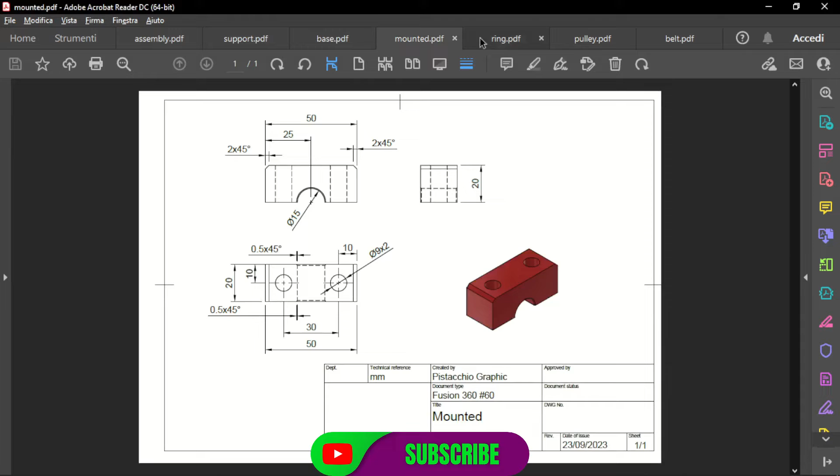Let's start this project with a new design here. We start to create the first part, that is the support. Create our first sketch here.

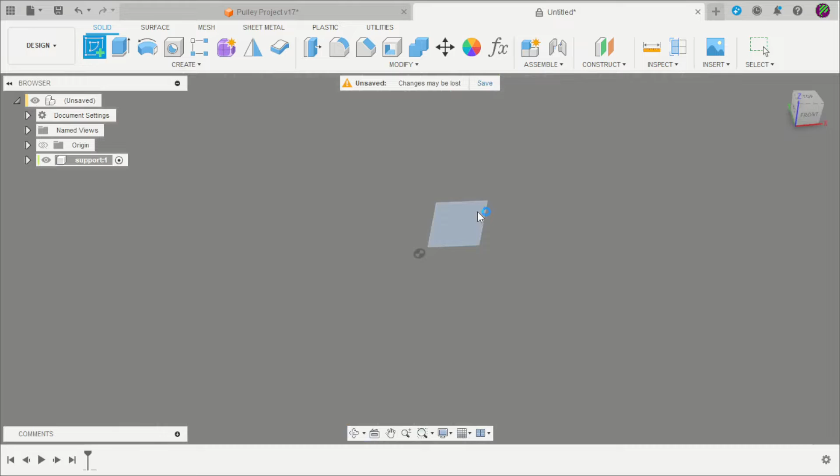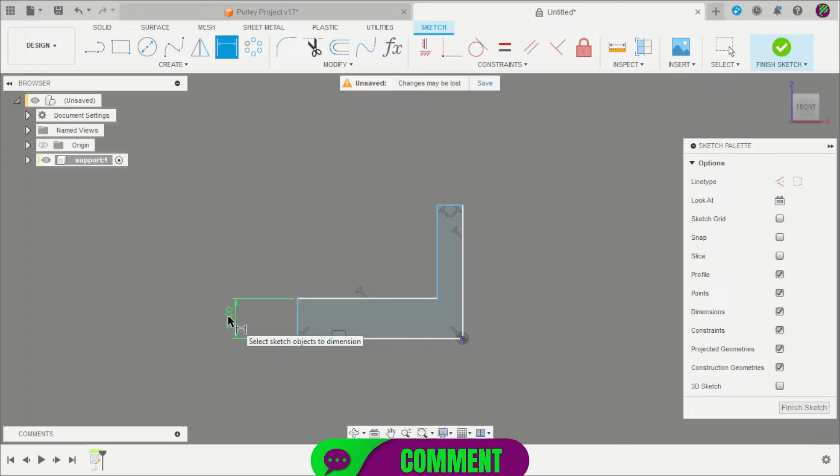Start the first lines. Constrain this point to the center point. 18mm thickness here. This is 208mm with 188mm.

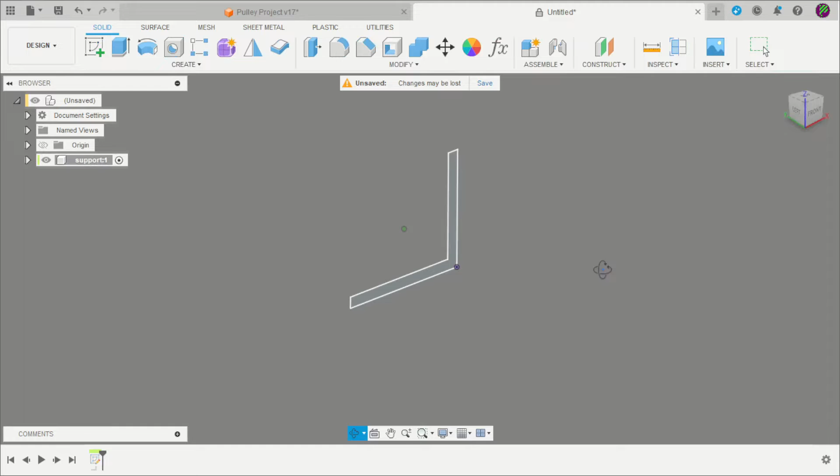Now we have our first profile. The width is 6mm. Use the extrude tool, select the profile, change to symmetric. The distance is the whole length—change to 60mm.

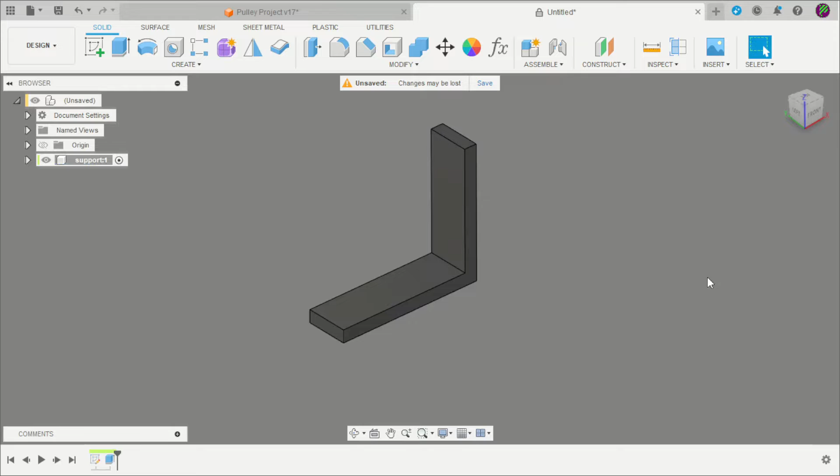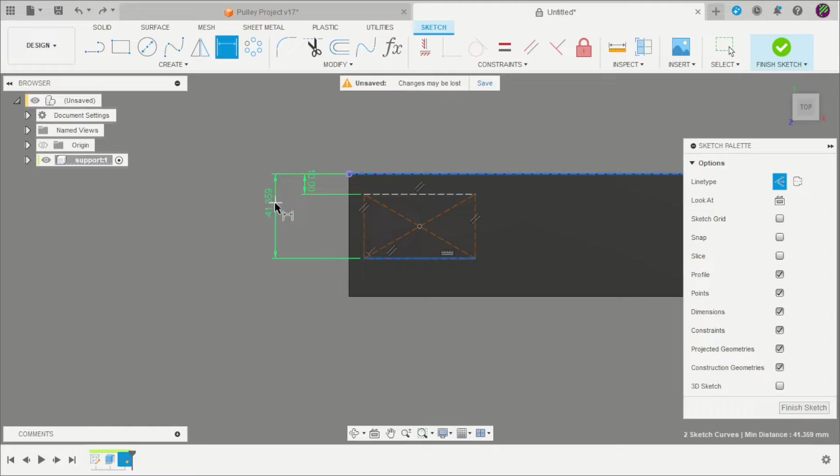Select this face. Start creating a rectangle by the center, but first we change the line type to construction, the rectangle by the center. Let's see the measurements here: this distance is 10mm, this distance from the border is 50mm, the other distance from the border is 12.5mm.

Here, 12.5, and the other distance is 87.5mm.

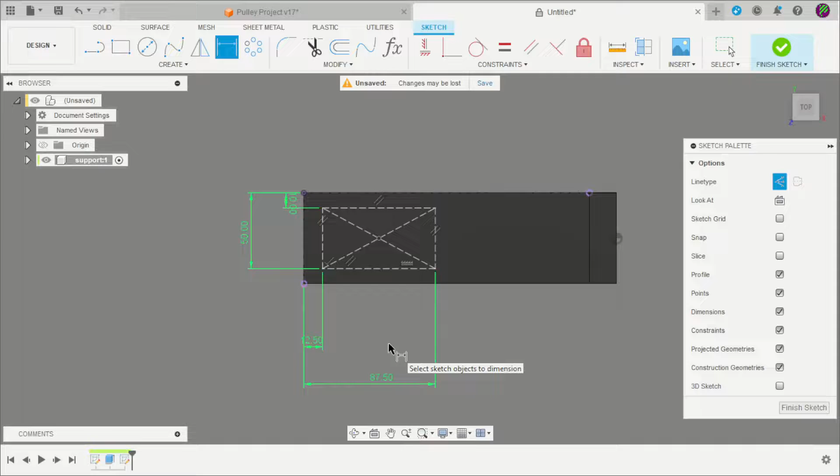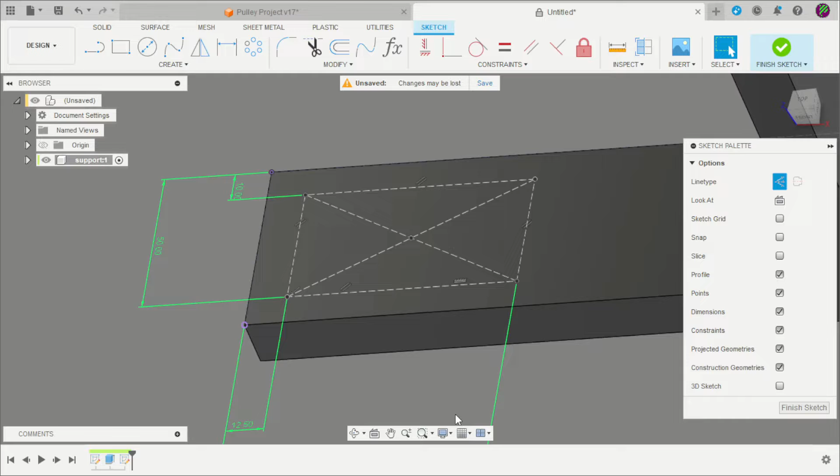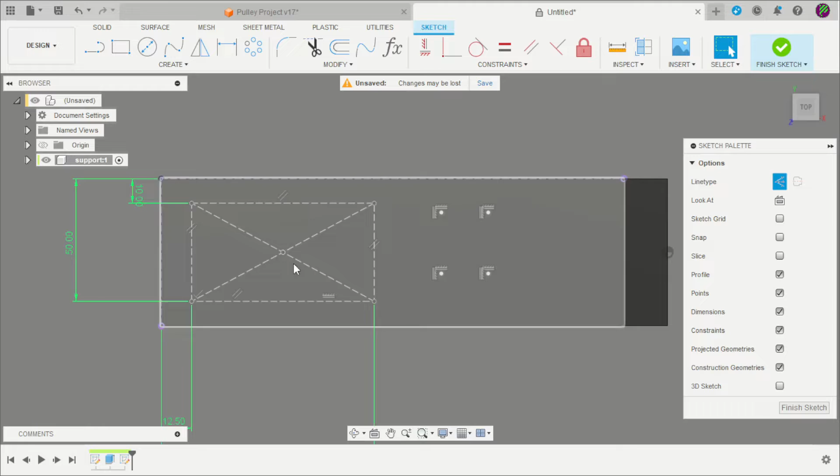Now I learned a technique to create these points, to make the holes in the project, from a subscriber on the channel. He said I can use this—it's easier to create points on the sketch this way than creating points and constraining them horizontally and vertically like before. He said using a construction rectangle by the center is better than my old technique, and that's the method I'm using right now. Thank you so much for this comment.

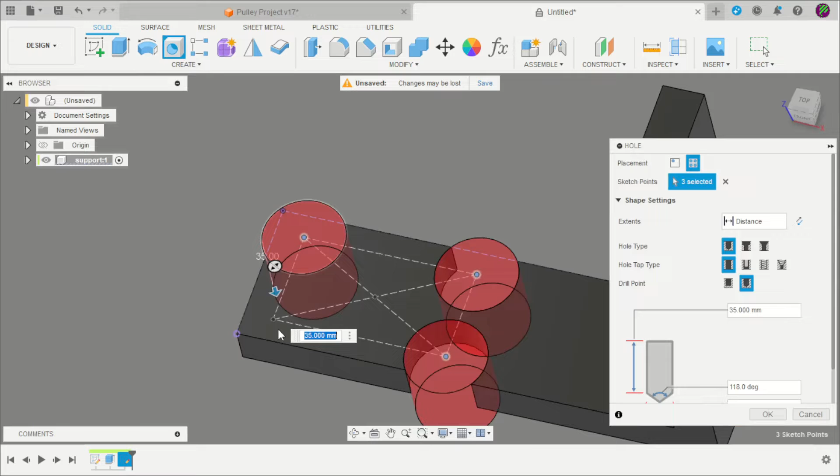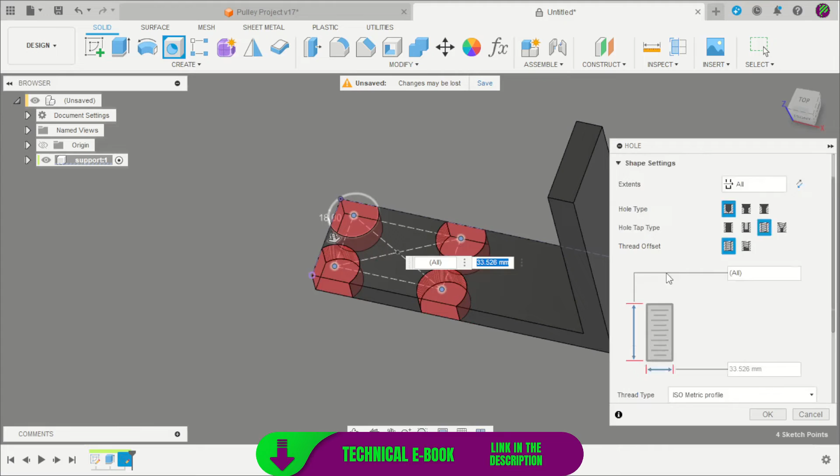Finish the sketch. Now I can use the hole tool, click on these points, return here to the project. This hole is M8 with 1.25mm pitch. This point is tapped. The distance is all the way through. The ISO Metric profile we change to 8mm, designation 1.25mm. Okay.

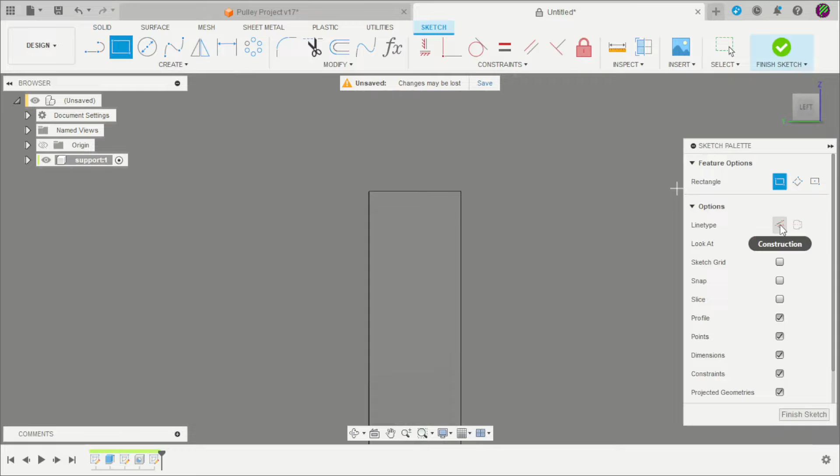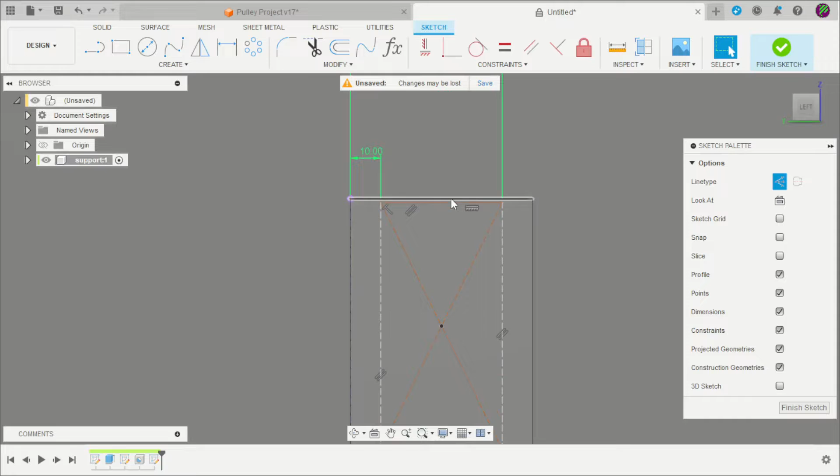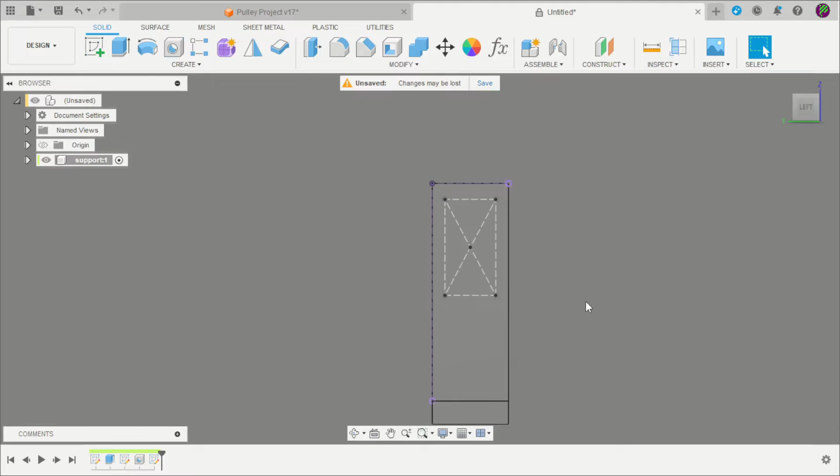Create the 4 points here. Hold command, click. It's the same designation, the distance is all the way, M8, that's the same. Okay, click OK.

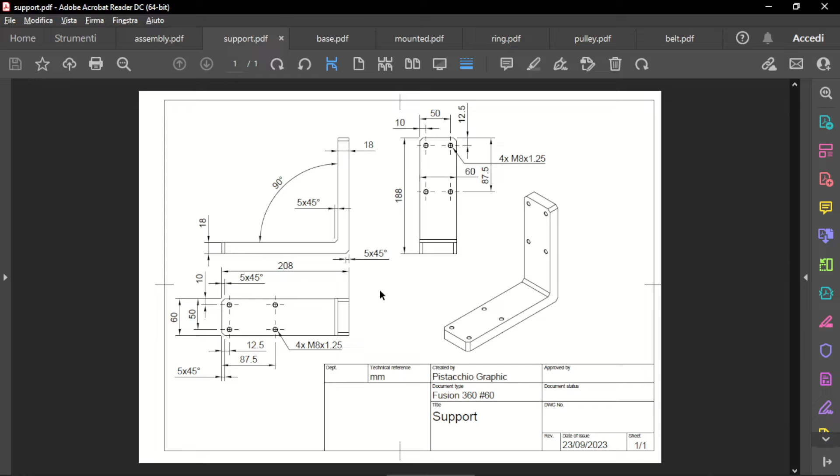Here we can return and make some chamfers to finalize this part, with a 5 millimeters chamfer. Select all these corners, here, here, and here, with 5 millimeters.

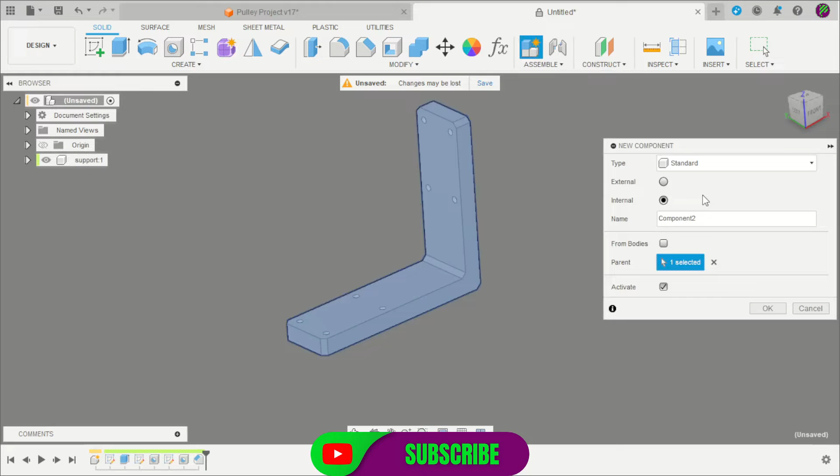The support is finalized. Now we return to the main project and create another component, the base. Hide the support, create our base here.

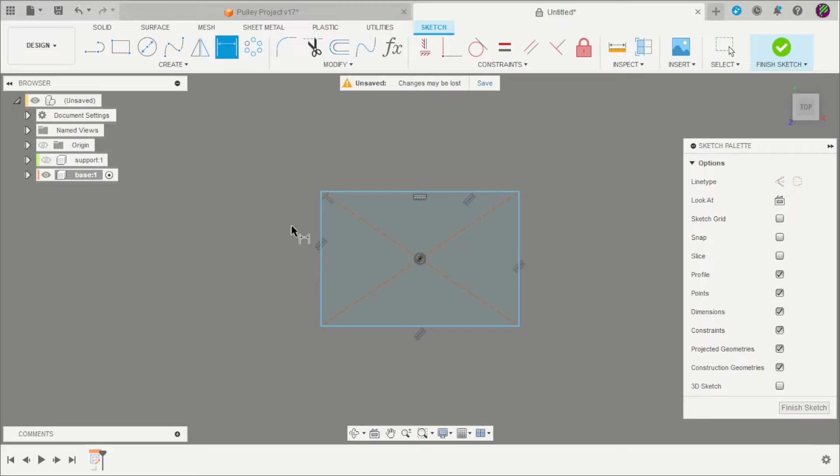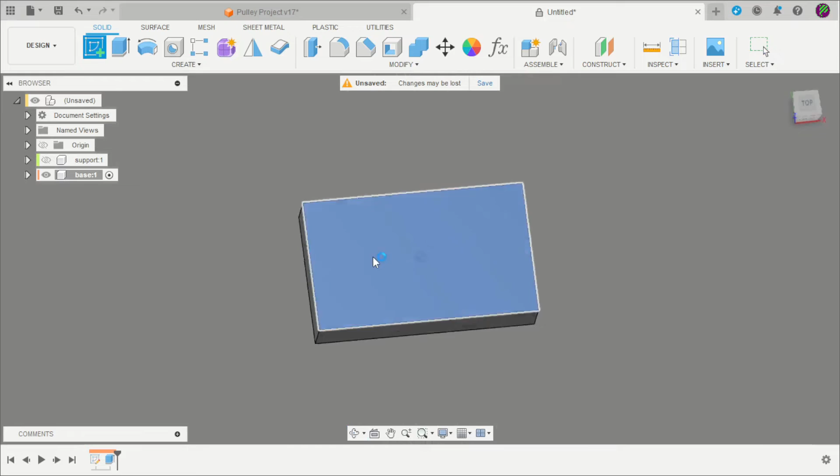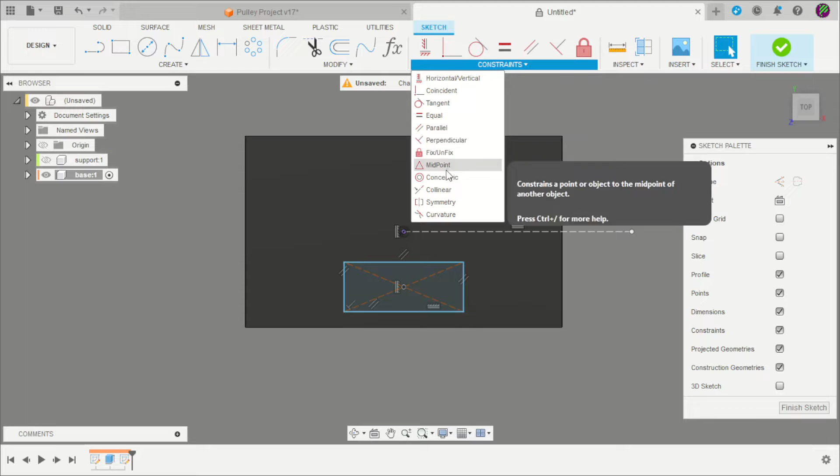And we can start creating these side lines that we create with another rectangle here, aligned by the center. Create a construction line. You can create here a midpoint constraint and a distance of 50 millimeters by 20 millimeters.

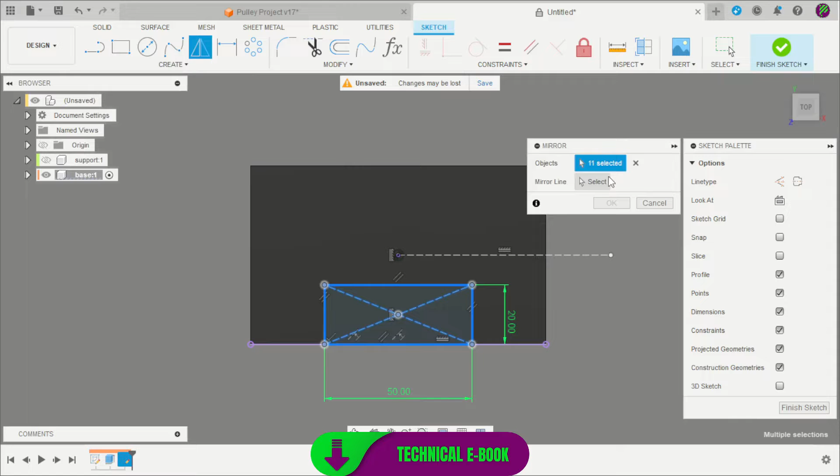You can make that a mirror and create that. This extrude needs to be 40 millimeters high.

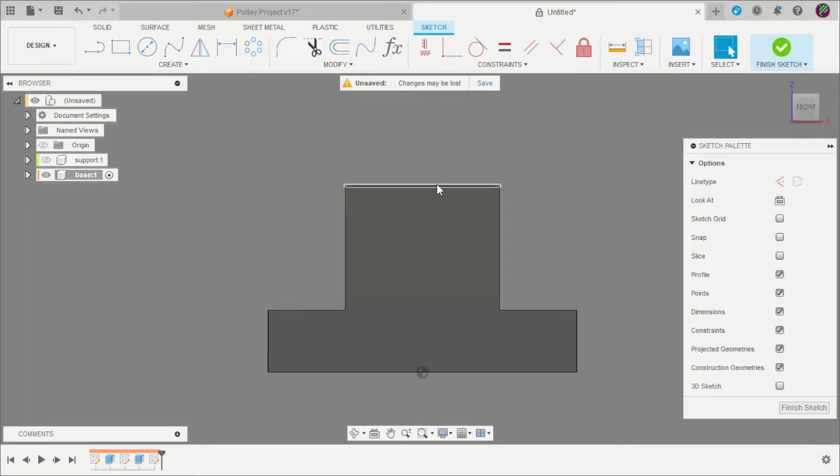Return here to the project. We can create a hole here on this face, a circle of 15 millimeters, here and aligned by the center.

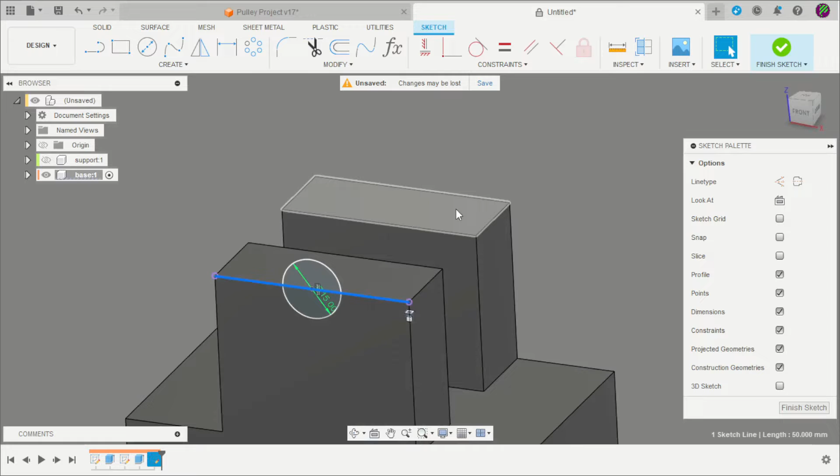You can change that to a construction line, just click X, finish the sketch, and remove all the material from this side. Change to cut. Okay.

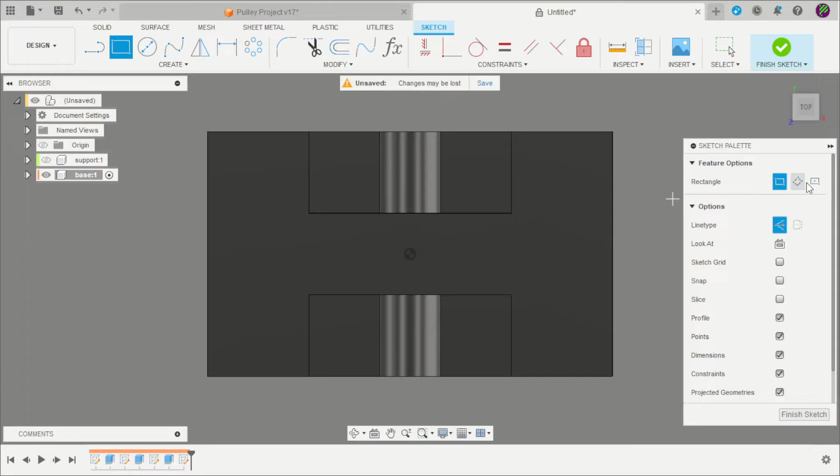Now we can start to create some holes here for the screws. We use the same technique—create a rectangle using the line type as construction, by the center, here. This bottom side is 30 and that is 40 millimeters.

Create points on these corners. Finish the sketch.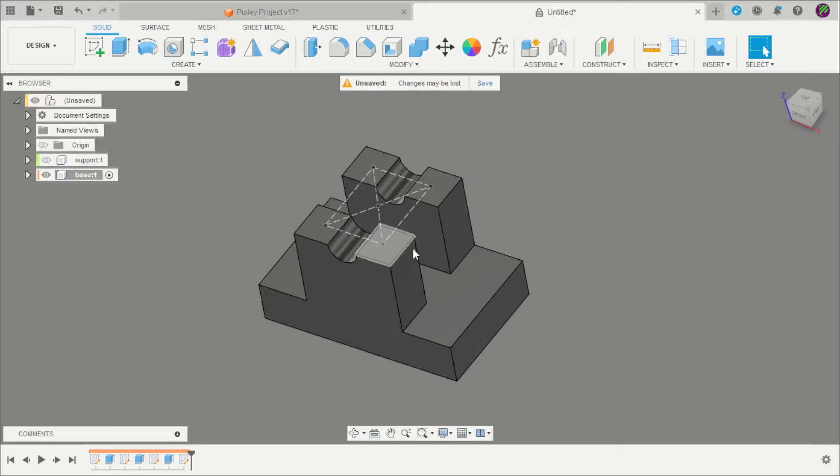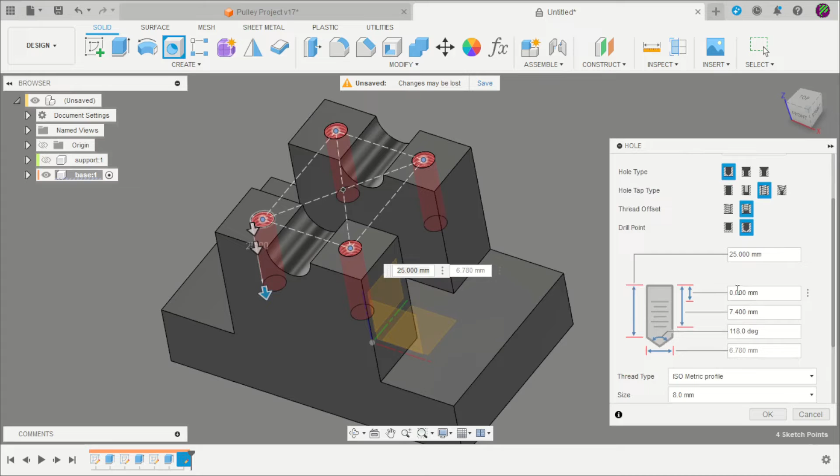Select the hole tool, select all these four, select thread offset. In this case, we need a thread offset here because the thread is 16 millimeters deep and the hole is 30 millimeters. Now I can change to 30 millimeters. The thread is 16 millimeters. The size is M8 by 1.25, and click OK.

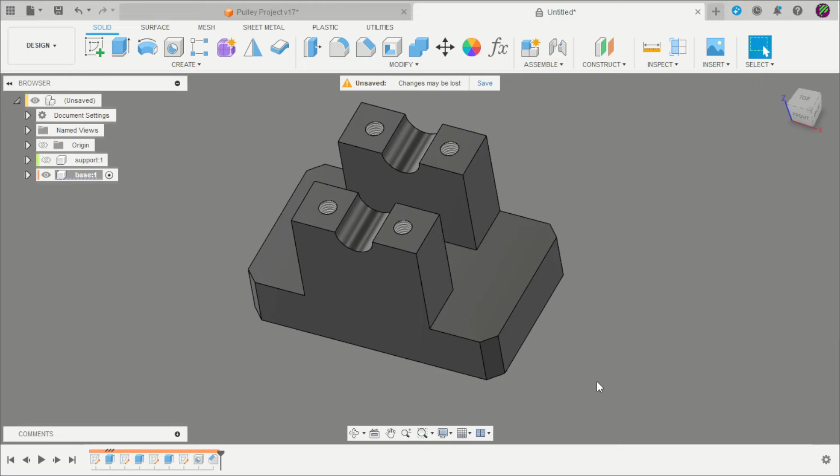Now I can start to apply some chamfers here to the project. Here on the borders, 5 millimeters. Another chamfer here and here with 2 millimeters, and another chamfer here as 0.5 millimeters.

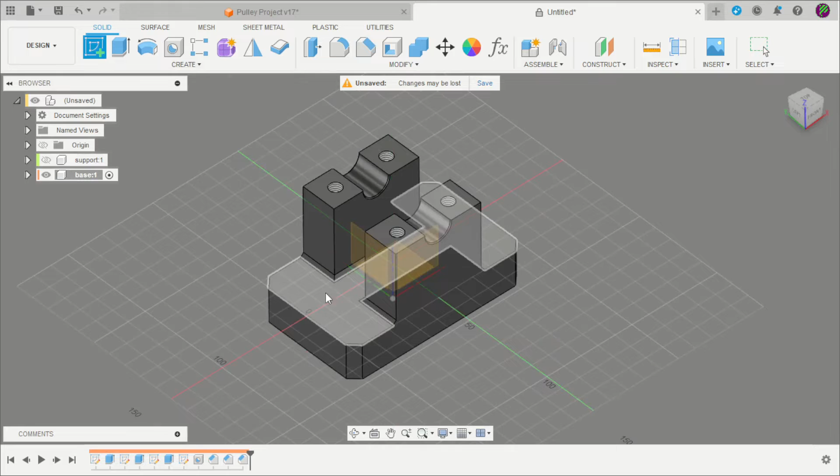The last tool we use here is the same technique: construction line, rectangle by the center. Here, this is 40 millimeters, and this is 75 millimeters.

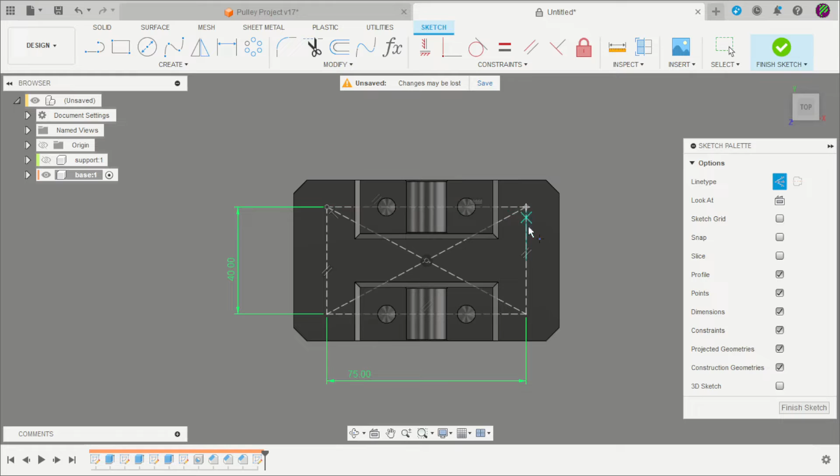Create all the points. Select the hole command here, select all the points. But in this case it's a counterbore hole. The type is simple and flat.

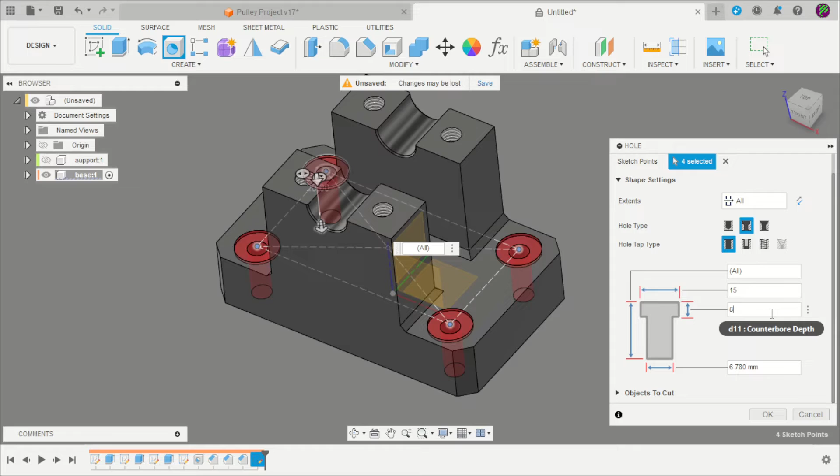The distance, it's all, but we need 15 millimeters and a depth of 8, the diameter of 9 millimeters. That's okay. And the base is concluded.

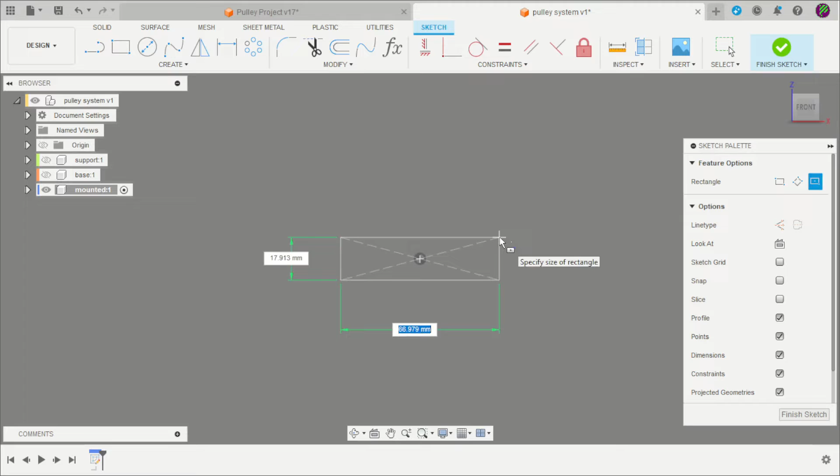Hide this component, return to the main project, create another component that will be the mount. Start and create the first sketch that will be 50 by 20 millimeters.

50 by 20 millimeters. Select the extrude tool. The height is 20 millimeters. Select the sketch, 20 millimeters.

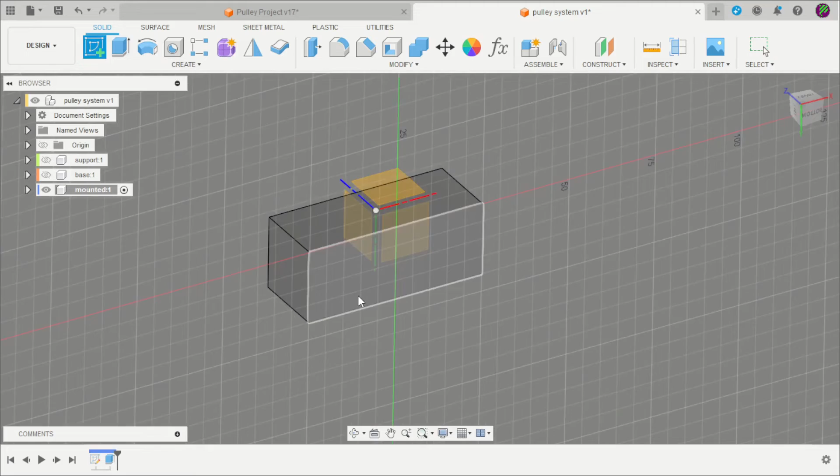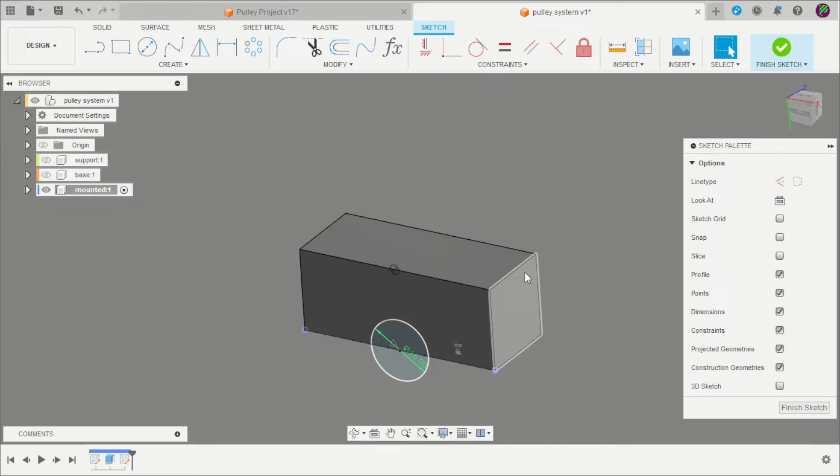We need to create a circle here with 15 millimeters. Select the midpoint constraint, click here on the bottom line and on the center point of the circle, that will fix it here on the center, and we can change it with the letter X to construction. E for extrude, select this circle and remove the material to the other side here. It's okay.

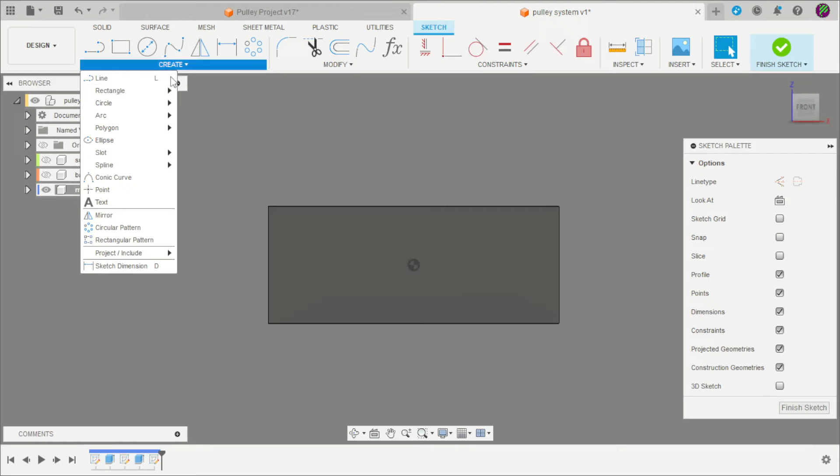Now we can create our holes here. Just create 2 points. Make that a distance of 20 millimeters, and click here, divide by 2. That guarantees this is in the center.

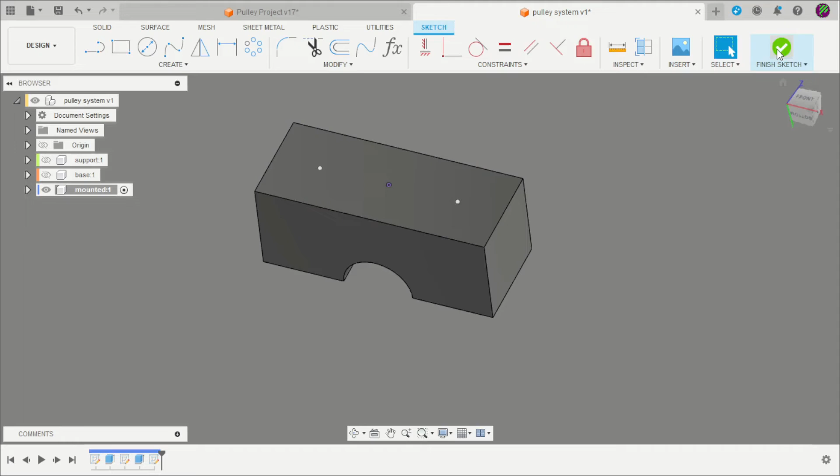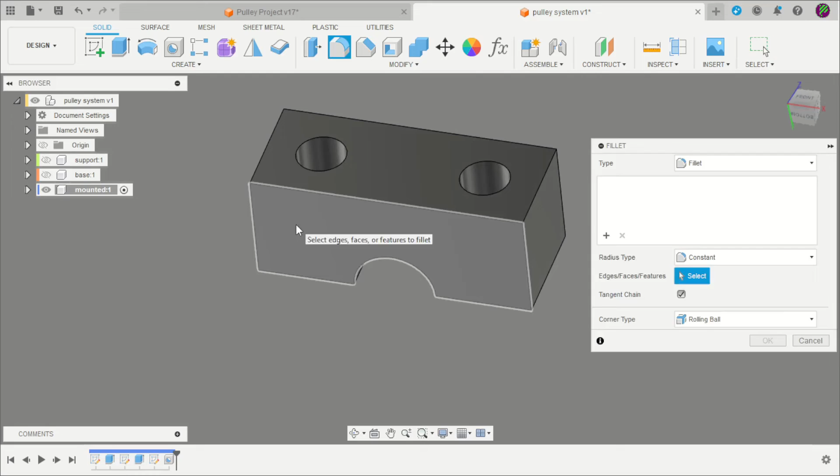Hole tool, select these 2 points, but in this case it's a simple hole with all and the diameter 9 millimeters. 2 chamfers of 2 millimeters here, and another chamfer with 0.5 millimeters.

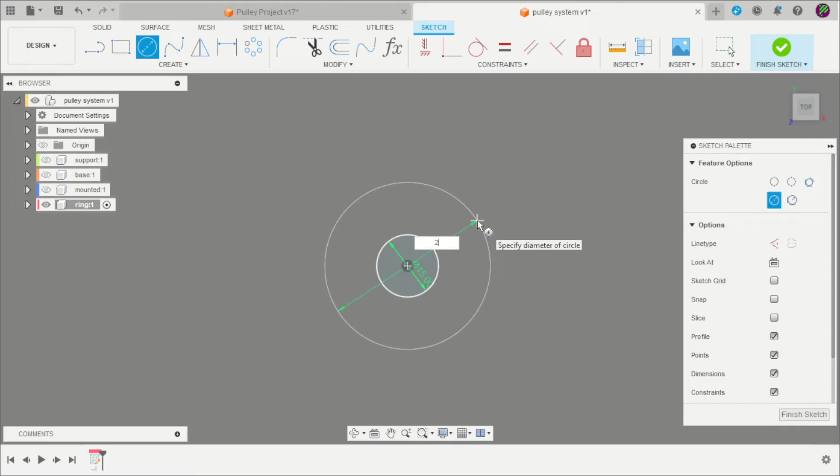Hide this component, return to the main project, create another component that will be the ring. Here we can create a circle with 15 millimeters and another circle with 22 millimeters.

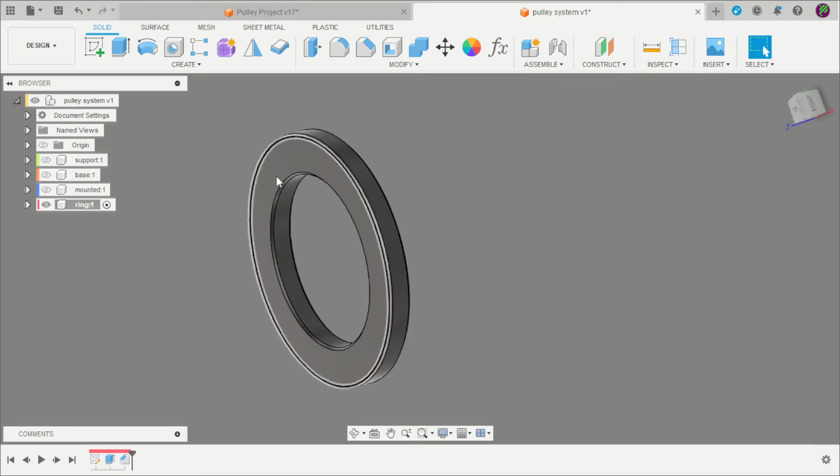Extrude that with 2 millimeters. Select all these borders here and here, 0.2 millimeters. Hide this component, return to the main project.

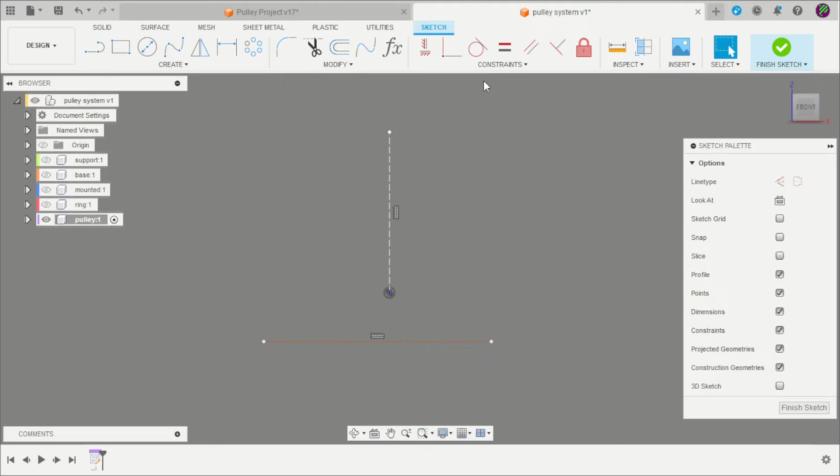The next will be the pulley. Into the project, create another sketch. We can create here a vertical line as construction and a horizontal line that we can change to center line, using the midpoint constraint here.

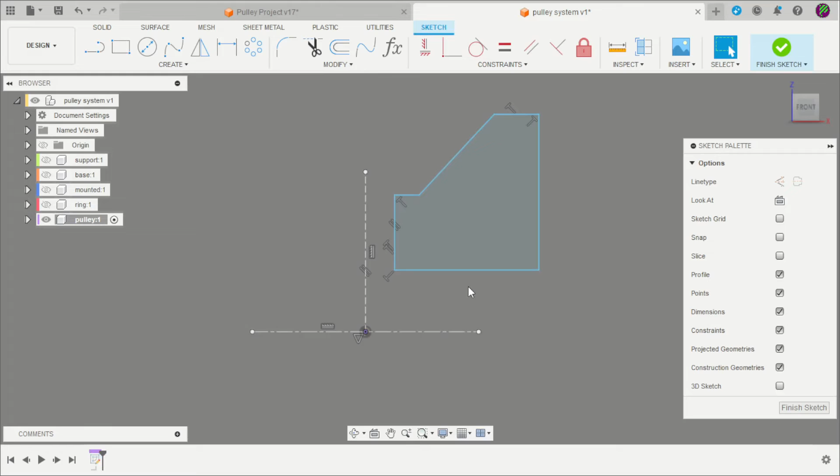Start to create our profile. This is our profile, this and this. Connect these 2 points. That will be 75 millimeters here. That and that is 15 millimeters. And this with that line is 55 millimeters distance.

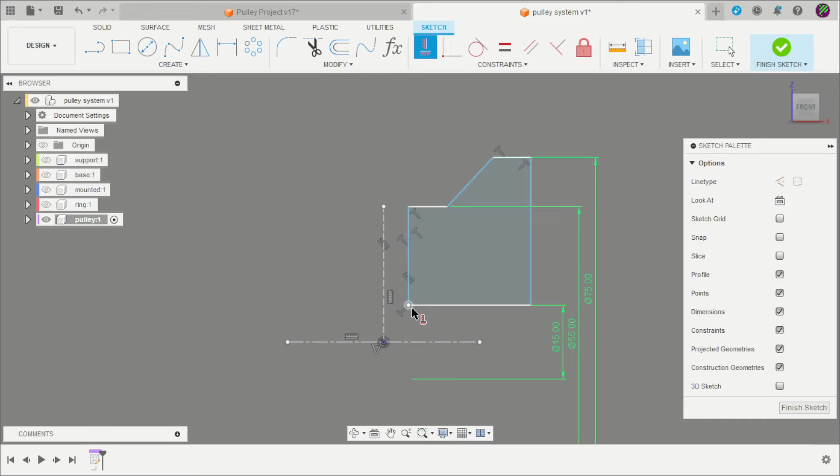These points need to be vertically constrained. This is the half; we can create it as 8 millimeters. These lines need to be 1.5 distance. It's 9.5 degrees.

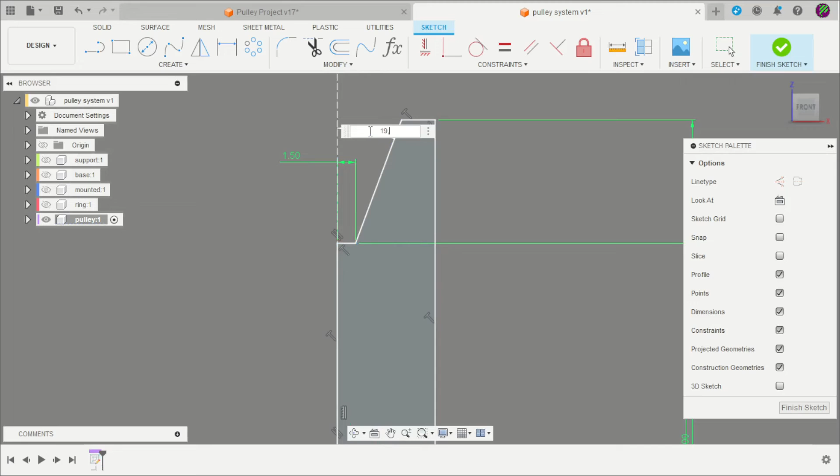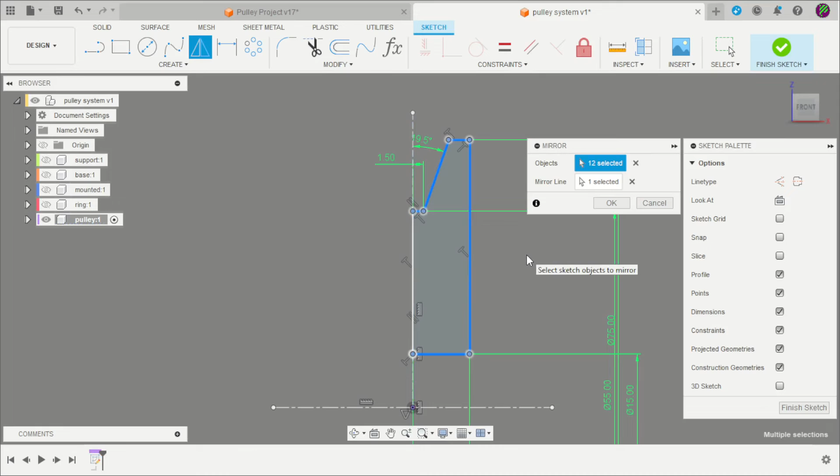We have our sketch constrained. We can mirror all these lines here. Hold Ctrl and click on this vertical line. Select the mirror line that is vertical. OK.

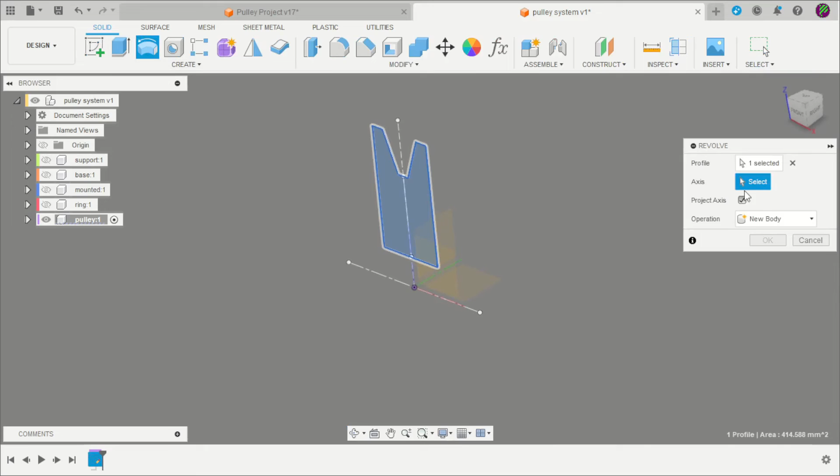We can change that line to a construction, to select just one profile. Finish the sketch. Revolve and select the axis. Create a new body. Now we have our pulley created.

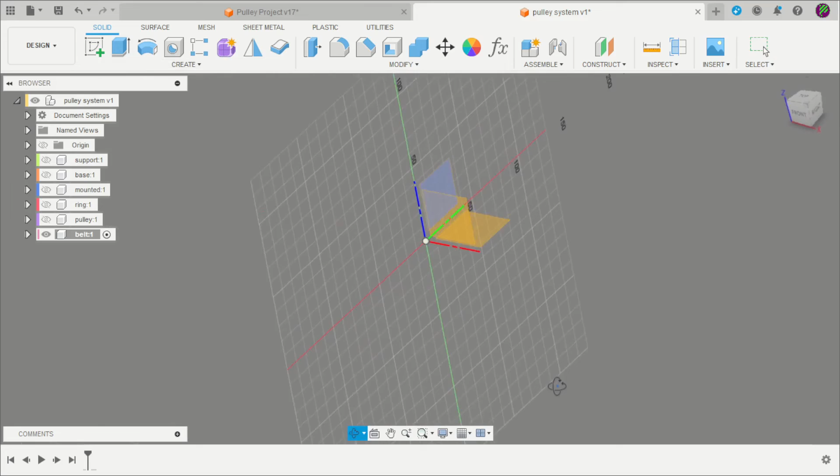Hide this component, return to the main project, and we will create our belt here. Create a new component that will be the belt. Create the profile here, and we can start creating.

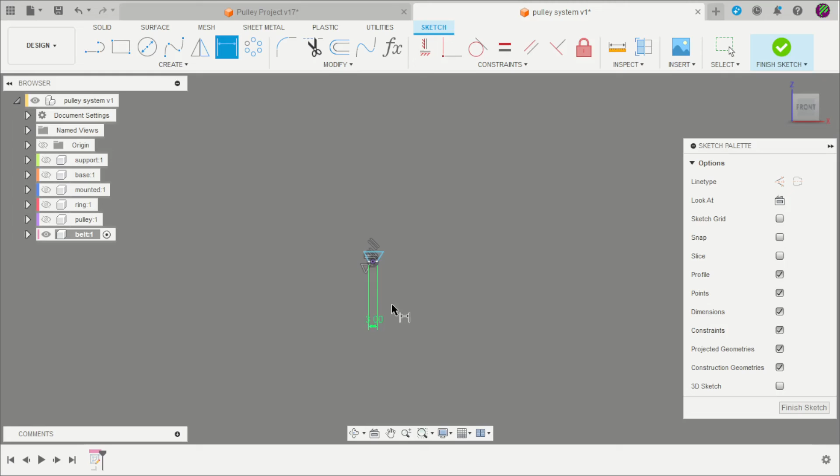The same profile: this bottom line can be constrained by the center with the center point. Just click as 3 millimeters. The distance is 9 millimeters.

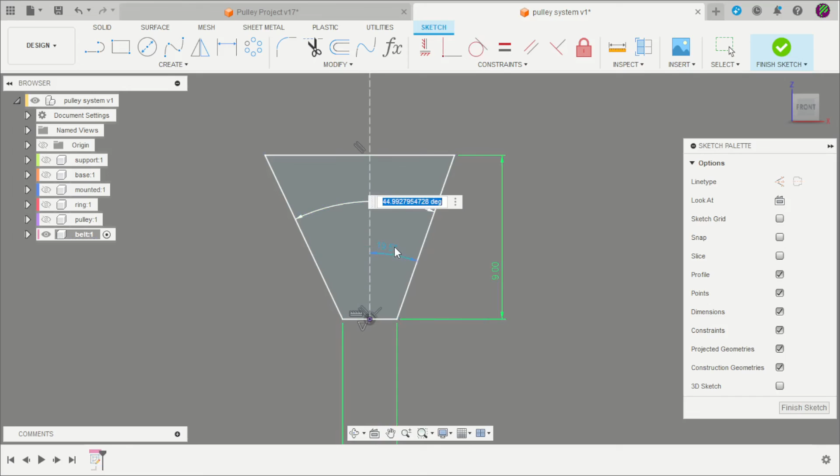Create a vertical line as construction to apply a 19.5 degrees angle, and that angle will be multiplied by 2. This is our profile for the belt.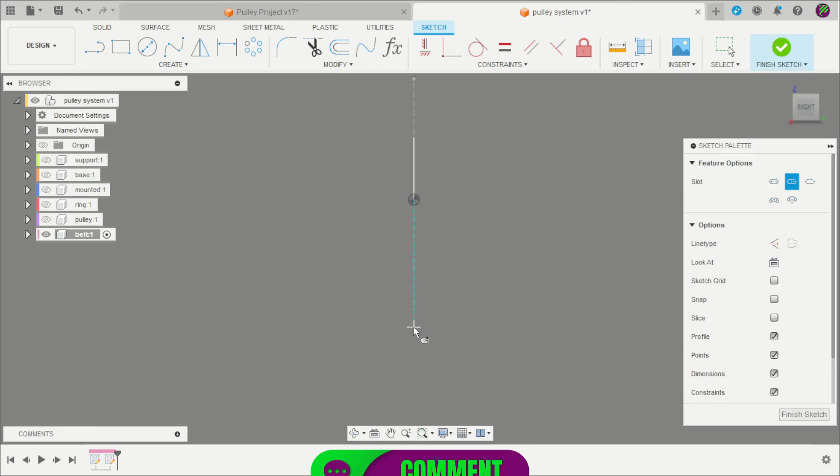Another sketch on this plane. Create a slot with the center point here, here, and here. Return to the drawings here, 55 millimeters. This is the diameter. We can be 27.5 millimeters.

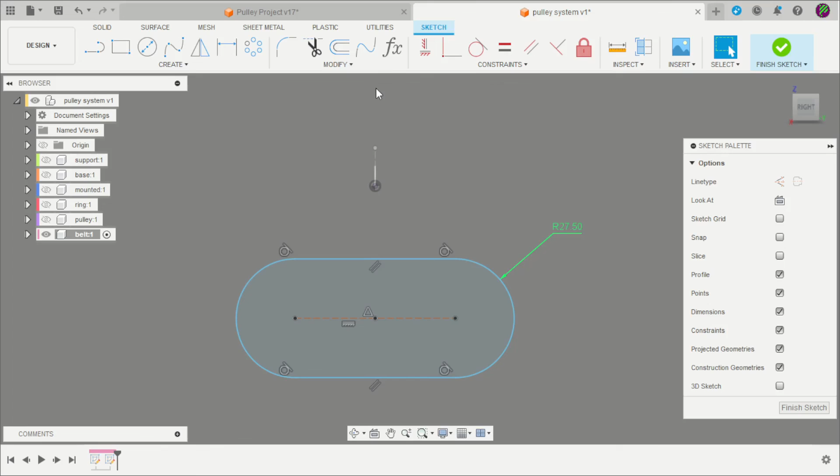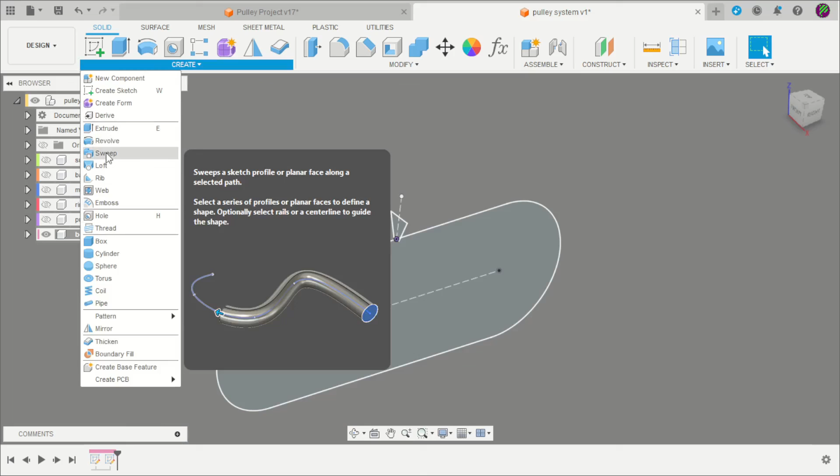This middle point can be constrained by the center point of the project. The distance is 100 millimeters here, 100 millimeters. And now we have our path to create. In the sweep tool, select the profile, change it to path, and here we have our belt created.

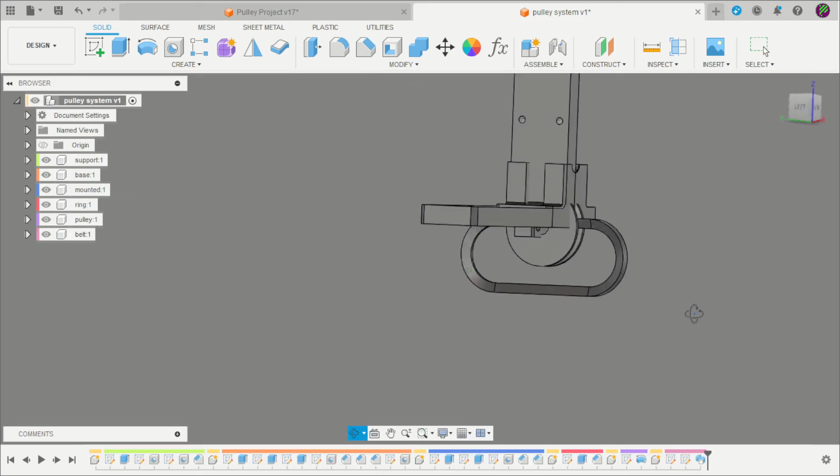Hide this component, return to the main project, right button, show all components. Our support needs to be grounded here. Now we can start to move these components that we created all to the same origin, here and here.

And in the next video I will show you how to assemble all these components and finalize this project.